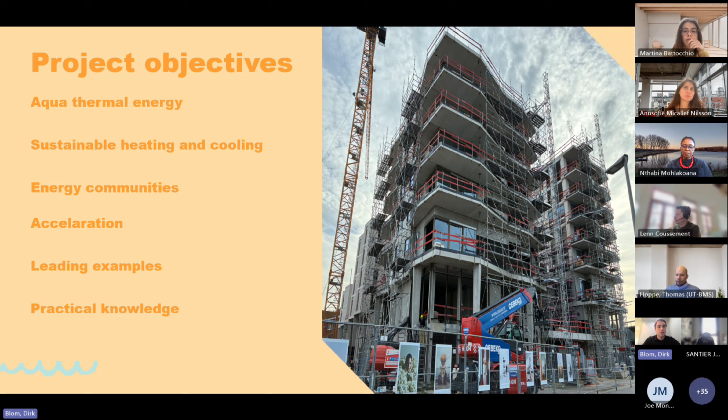Go to the next. So don't get distracted by the complex structure. This is merely an overview of which work packages we have within WaterWarmth. So the first one is mainly on the potential of aquathermal energy. So looking into where could we fit in aquathermal energy installations. The second one is the pilots. So those are small scale, as we call them. So with a few connections and implemented within the lifetime of the project.

The large ones are within work package 3. Those aren't developed within the lifetime of the project, simply because they are too big and too massive to realize within a short amount of time, so to say. Normally they take around 8 to 10 years, so that's quite a large time. Next to that, we also look into the theoretical optimization of energy systems to make them work more efficiently, and also integrate the aquathermal energy systems with energy and electricity.

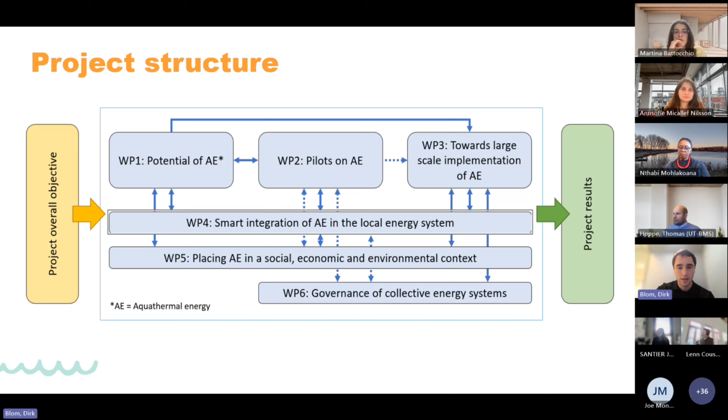And in work package 5 and 6, we're mainly looking at more the policy strategy on governance, and the economical impact and the social and environmental impact, and how it could make a positive impact on our energy and heating transition. More on that later in this webinar.

So a short overview of the highlights per work package. So, mentioned the pilots. In work package 3, we're doing feasibility studies to see whether or not large scale sites could be feasible and also scalable towards other project ideas in other areas of Europe. Another thing that we are doing is we are calculating the socio-economic potential for the whole North Sea region of Europe. So actually, we divided it in 39 NUTS2 regions, and we give an estimated overview of the potential of aquathermal energy in comparison to, for instance, gas or oil.

All right. So these are, I hope you can read it. It's quite a sharp, bright light. But actually, in terms of products, what we are working towards is the quick scan tool. We already did a webinar last time on this one. Hope you have visited, and otherwise you can always download the quick scan tool because it's available on our website. We are also looking into building a roadmap for project development to make clear for every project developer which steps need to be taken from project idea to maintenance and maybe a next project.

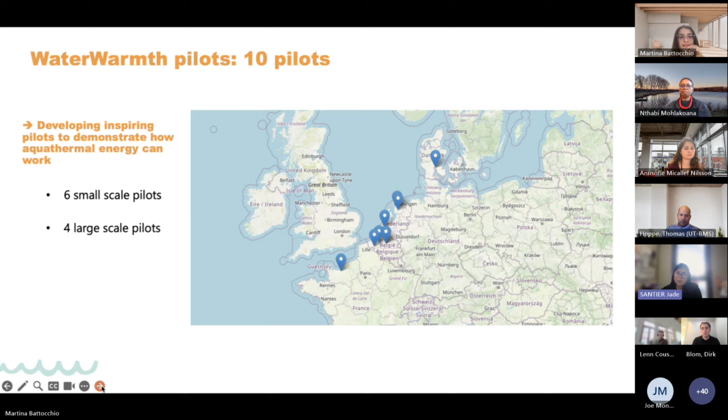So the 6 small scale pilots are distributed across different countries: Denmark, the Netherlands, Belgium, and France. The first one above is the one in Denmark, in Middelfart, led by the commune of Middelfart. Then you have the Baard Village in the Netherlands, managed by the city of Leeuwarden. Then another one in the Netherlands, the Firma van Buiten, led by TU Delft, another academic partner. Then 2 in Belgium: one in the city of Mechelen, and one hub in the city of Kortrijk that Dirk already presented earlier. And then in France, you have our pilot site, located in Ouistreham, which you will see just after.

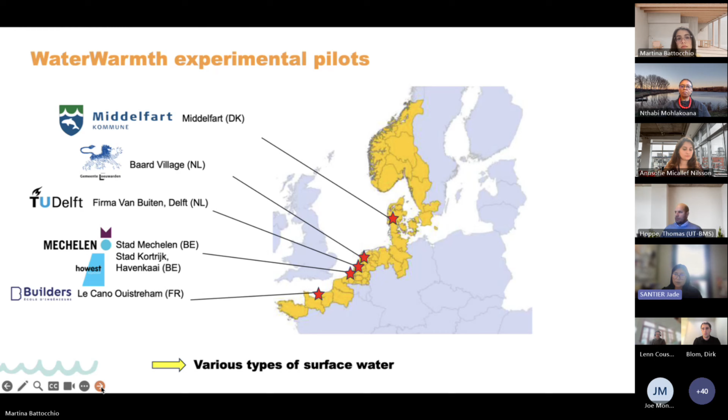The innovation part for these experimental pilots is that we use different types of surface water, which you will see as we go through the tour of the different pilots. So if you can move on to the next slide.

Just for you to have an overview of the pilots, so you will see the 6. The first one is our pilot, in Normandy, about 15-20 minutes driving from our school. That's why we chose this pilot, because it was really close to our premises, really easy to collect data. It's like a school, a center of nautical activities, really close to the sea and located in the port area. For this one, we will use the seawater.

This was already done in Normandy, in fact, and in France—we use a lot of seawater to heat buildings. So we will collect the seawater; the works are already done, I will explain it just after, to heat all the sanitaries and the building. So this is for the French part.

And then on the Belgium side, you have the pilot site in Mechelen, which is the castle of Den Bosch, currently under renovation. We're still waiting for the answer from the investors of the castle, but the feasibility study is already done. We've been a bit late with this one because at the beginning of the project we lost one of our partners, which was the initial pilot site for Mechelen.

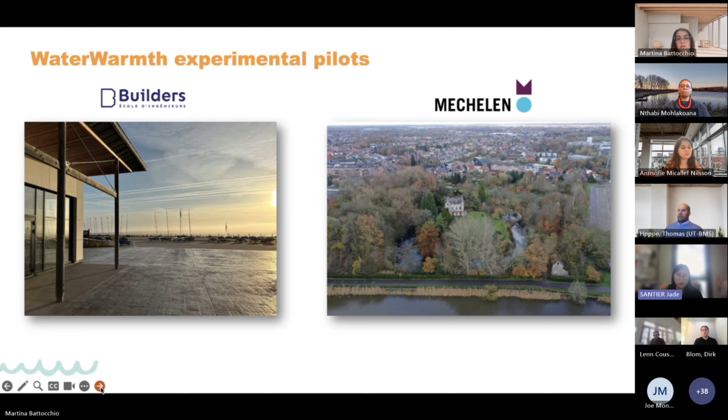Moving on to the next pilots. This is the second pilot from Belgium that Dirk already showed the video, the one in Kortrijk that we visited last week, which is an academic and residential area for students. You already have students living there.

The particular point about this one is that it's a hybrid system. You have the geothermal system and the aquathermal system fed by the Leie River near the area, which will be used to heat the building. This is really important because we visited it last week and saw that students are already living there, which was particular because it's a totally new building. They had to coordinate the construction calendar with the installation of the heating and cooling system, but hopefully we'll start collecting data during the winter.

Then you have the one in Denmark. To explain the situation a bit, for political reasons this was really difficult for the pilot site in Denmark. We had to think about different plans and situations because the Danish government was a bit skeptical regarding the use of aquathermal energy, so there was a lot of work involved in supporting the policy.

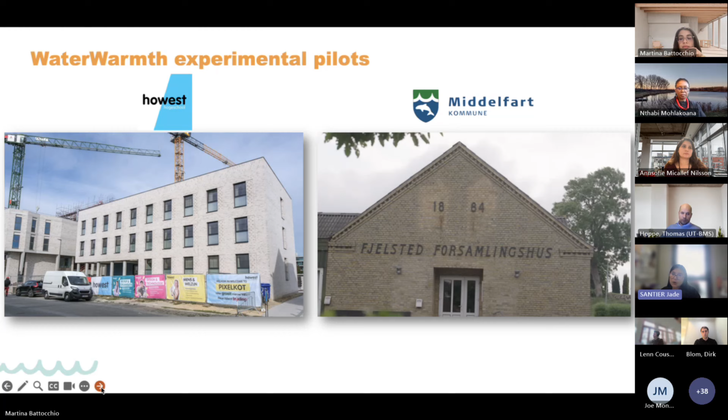Now we have the two last pilot sites, the two Dutch pilot sites. The first one is led by Delft, the Firma van Buiten that we visited last year. For the moment it's a temporary location, and it's a catering and conference venue, which we could see and test last year.

For the type of surface water used here, it's standing water around the building, so you can see we really have different types of surface water across the pilots. For this one also, all the technical studies are almost done, and we are expecting to collect data this winter.

Our last one is the other Dutch pilot, in Baard village, a small village in the province of Friesland in the north of the Netherlands, with less than 100 houses. The experimental part for this one will be to heat 5 houses and a primary school. You can't see much in the picture, but there's a lot of water in the village, so the idea is to use the water from the village to heat these houses.

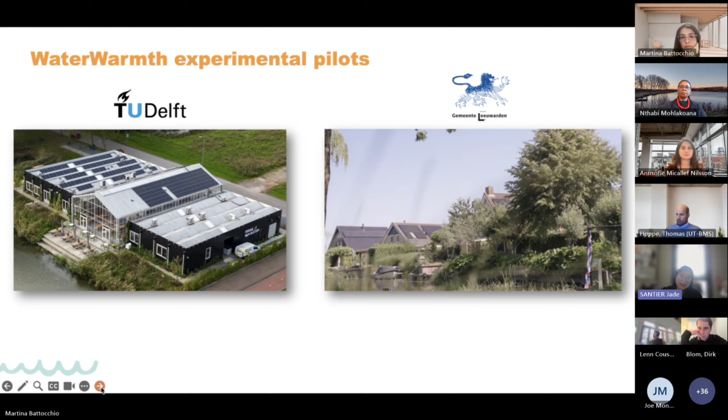Moving to the next slide, regarding progress: not all pilots are yet fully implemented, meaning we're not yet collecting data everywhere, but more than half of the pilots will be collecting data this winter, some before the end of the year and some at the beginning of next year. This has been a real trouble for us, all the experimental parts - I'll explain more after - but finally, after 2 years, we can say our pilots are almost running. That's a blocking point that is now, I hope, gone, which is a good thing.

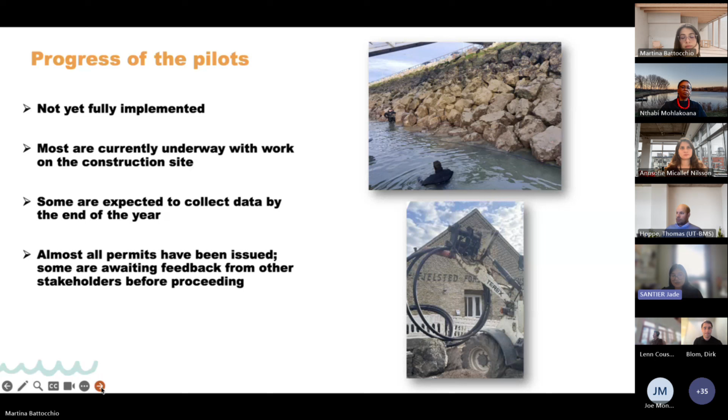And almost all permits have been issued. The permits are just the transition to the next slide and the last point. Let's move on.

The permits took us a long time to get because, as Nthabi mentioned before, we have 4 different countries with different regulations and different authorizations to obtain, and this has been quite long for us, depending on the different pilots. It's also because of the complexity of the pilots. For example, in France, we are in the port area, but also located in the city of Ouistreham, so we had different stakeholders to take into account to get authorizations, and also a lot of people around to consider. This was similar for almost all pilots.

For example, I think it was the Dutch pilot, they also had to ask the water board, etc. This was quite difficult because we had to prove that it's good for the environment, that the project is sustainable and will have a real benefit. So this was the most tricky part.

And the second challenge that we're now more and more exiting from in the project is all the budget parts, because we have to know that the project was submitted in 2022, and now we are in 2025. Some years have passed and some events also, so the cost of the pilots has increased a bit, along with the budget.

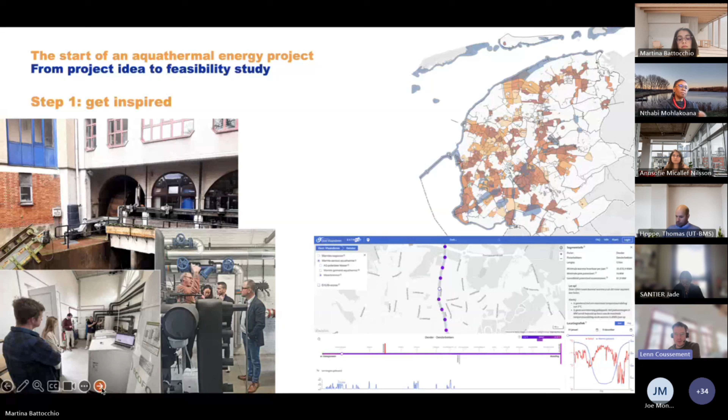So once that project idea is active or is in the minds of the people, what is then the next step? Martina, you can go to the next slide.

We think the next step is to perform the quick scan, which we developed in the WaterWarmth project, and which aims to quickly identify any issues that might arise when you want to implement an aquathermal energy project. It goes into detail - it's an Excel tool, you fill in your site details. It's made to be done for either a building, or multiple buildings, or even a district heating network.

The idea is that you have certain checks and balances. Sometimes you have to fill in a number, sometimes you can choose from a drop-down list. In any case, at the end you will get an overview - a green light means you can go ahead without worries. Sometimes you will get an orange light, which means certain things need to be looked into more detail and might require some next steps. And sometimes you get a red light, which means that's a game changer, or it's a showstopper for aquathermal energy.

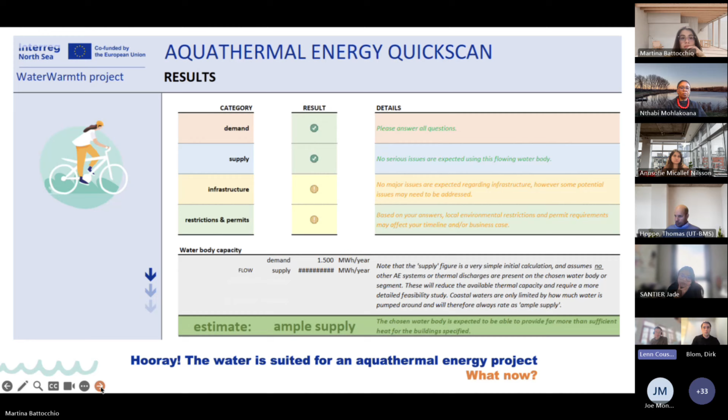To give an example, if there is no electrical capacity on your project site left to build a heat pump, then that might be a problem. So in the end, if there are enough green or orange flags, you can go to the next step, which is a pre-feasibility study. And that's when you really, as an engineer who performs these studies, go on site to check things.

The pre-feasibility study provides an answer to, let's say, 4 major questions. And the first one is, can we see things that might make the project not feasible, that have escaped the attention of the quick scan user? Because our idea is that a quick scan is something that anyone should be able to fill in to evaluate their own site, whilst the pre-feasibility study is something that is done by an aquathermal energy expert. And that aquathermal energy expert might see things that have been missed by the person who filled in the quick scan.

We also evaluate in a pre-feasibility study things that really need to be studied in detail to make sure that a project is feasible, which can be around all sorts of things like water depth, water quality, thermal impact, you name it. But in a pre-feasibility study, the aim is more to identify these things than to solve them all in detail. Also, a very important aspect is that we try to have the first conversations with the public water authorities about a project, to see what they think and feel about what is intended. And that can also be an input for the next steps when, for instance, designing a possible solution.

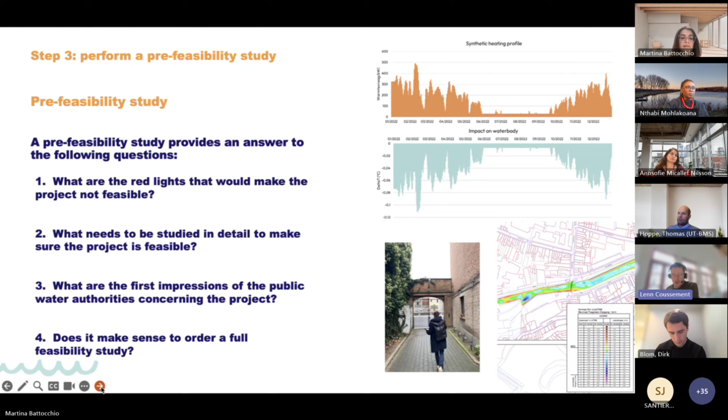Okay, can you go to the next slide, please?

So once your pre-feasibility says that there is actually some potential for aquathermal energy and there are no major reasons why not to go to a full feasibility study, then you can go ahead and have an aquathermal expert go to the bottom of things. In a feasibility study there are 4 major parts, and one of the most important parts is what the thermal impact on the water will be. In a lot of countries, there are certain limits about how many degrees of temperature difference you can create by doing an aquathermal energy project. So that's something that we will always try to study in detail. The movie you see on the top of the slide is actually a detailed analysis of locations where a thermal impact is being generated and the maximum temperature decrease it generates.

The second part of the feasibility study is all about what the technical concept can be for aquathermal energy, but often it also includes other green energy technologies. Sometimes fossil fuel backup systems are also included, but we try to avoid that, of course. So that part of the feasibility study really tries to find the optimal solution for the technology, which is not always 100% aquathermal energy. It can also be a mix, a combination of different technologies.

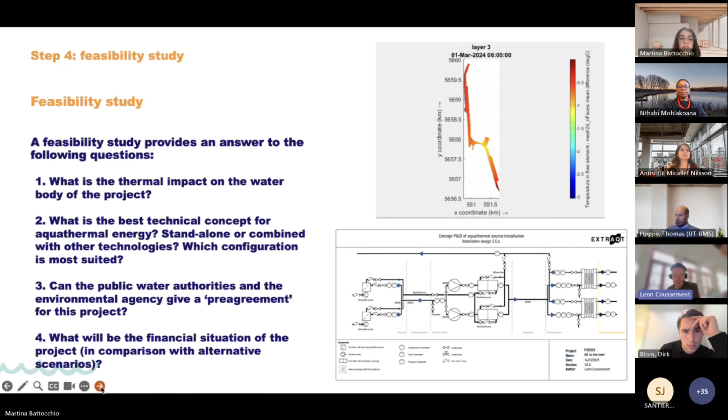Oh no, first, the theory about what is a pre-feasibility study and a feasibility study: we've made documents that go into detail, which we call product sheets. They can be used by someone looking for these kinds of studies to evaluate, if they get an offer from a party, whether everything is included that should be included, or they can even use this document to prepare a tender for a pre-feasibility or a feasibility study. These documents can be downloaded on the same page as the quick scan tool if you are interested in that.

Okay, next slide, please. And this is the last slide and the last phase of the feasibility trajectory. So once you've reached the positive result of a feasibility study, you will typically try to go to financial close, and all the steps in between the end of the positive feasibility study and the financial close will be worked on by the Work Package 2 and Work Package 3 team to specify a roadmap, all the things that could happen and need to happen to get towards realization.